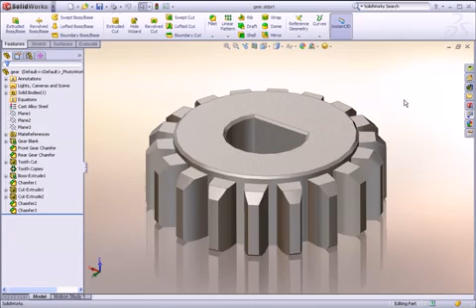Do you find yourself always manually filling out your title blocks? Instead of doing this each time you create a drawing, here's a way you can set up part and drawing templates to work together so that it fills out your title blocks for you automatically. This takes a few minutes to set up, but will save you lots of time each time you go to create a drawing. The trick is done with something called parametric notes or smart notes.

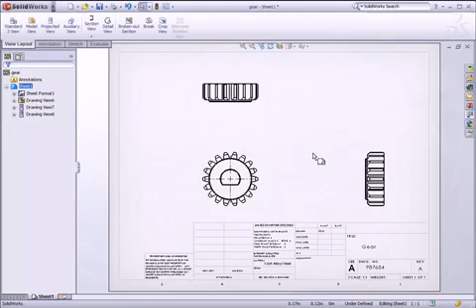The smart notes in the title block will work with some properties in the part file, so we'll go through how to create templates for each so they can work together. Let's start with the part template. Creating new templates is easy. You can start with the default template, make the changes you want, and save it as your own custom template.

For our purposes, we need to add some custom properties in the part template that will later be used in the drawing. So I'll go to File, Properties, and on the Custom tab, I'll fill in a few properties that will go in the title block. I'll leave the text blank in the template and come back to this later when I fill it out for an actual part. For the material, I'll be sure to use the SolidWorks material property that's specified in the feature tree.

Once I have a few properties added, I can save the template. To do this, all you have to do is go to File, Save As, and change the Save As type to Part Template. I'll give it a unique name and click Save. The next step is to set up a drawing template that links to the properties that we just added here in the part template. I'll create a new drawing from this part template.

Just as with the part template, I can change any document properties and save them in the template. But in this example, I'm mainly interested in adding the parametric notes that reference the properties we just set up in the part. One key step in doing this is that I need to add a view to the drawing that includes the part. I'll show you why in a moment. So I'll click the standard 3-view button and click OK.

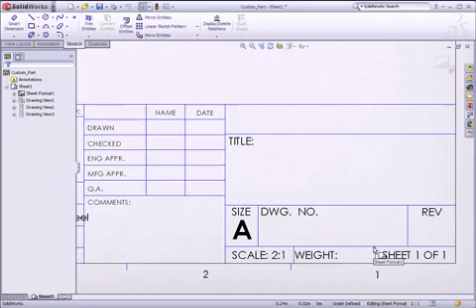You may have noticed as soon as I did this, SolidWorks filled in the material. That's because the title block already had a smart note in it. Let's look at how to add some more. I'll right-click and edit the sheet format. And when I go to add a note, instead of typing the note in, I want to link it to the model's custom properties, so I'll click the link icon.

Remember, we need to link it to the model's properties, not the current drawing's properties. When I select Model here, all I have to do is choose the property from the drop-down. I'll quickly create smart notes for a few more of the custom properties that we set up in the part template.

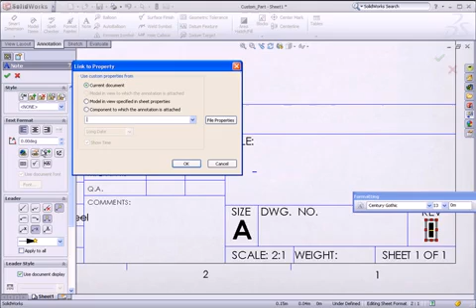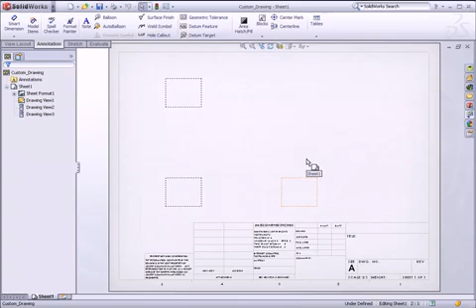Once they're added, I can save the drawing template just as before. I'll go to File, Save As, change the Save As type to Drawing Template, give it a unique name, and click Save. So let's try everything out. I'll start a new part and choose my custom part template. I can create a quick extrude. And give it a material.

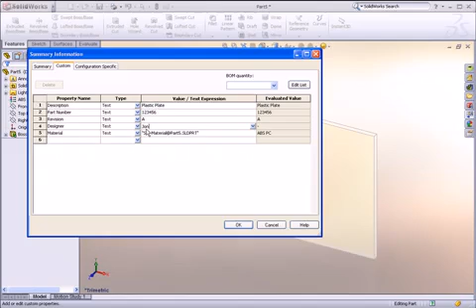Next, let's go ahead and add the properties for the drawing. I'll type in the values. I'll click OK and save the part. To finish up, let's make a drawing from this part. And when I choose my custom drawing template, you can see right away that all of the notes and drawing views populate automatically. In this example, I showed you how to set up part and drawing templates.

Keep in mind, this works for assemblies and drawings as well. Like I said before, this may take a few minutes to set up your templates to work this way, but spending a little time up front will continue to pay off each and every time you create a drawing.